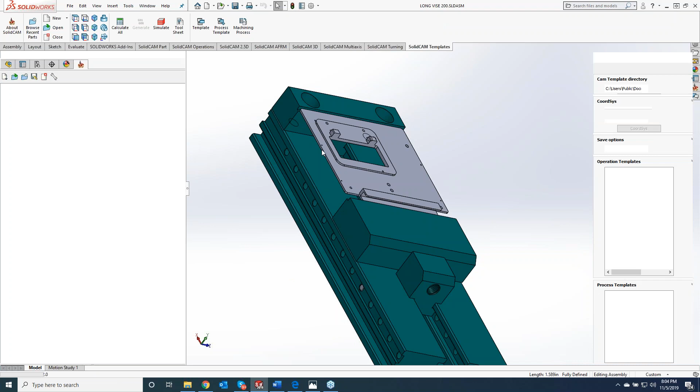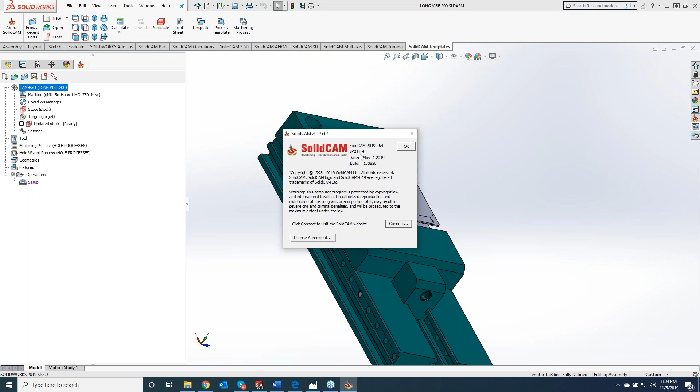Now, one thing before we get too far in this operation, what I would like you guys to do is, when you get to work or even now, go up to your help menu and check out your About SolidCAM. If you guys are running SP2, HF2, or HF3, definitely go to the website and download HF4. A lot of new improvements that development has added in there, as well as feature requests and some fixes as well.

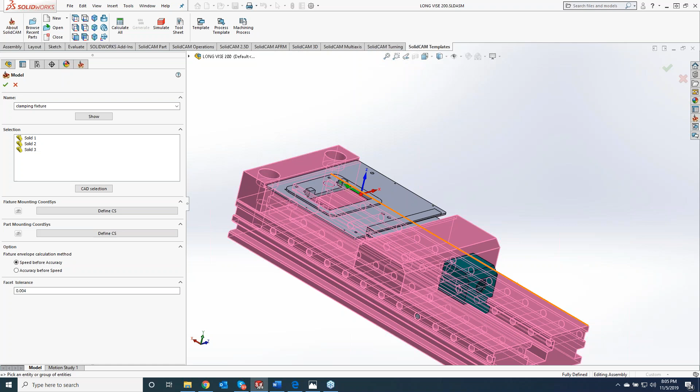Okay, so first thing I'm going to show you all the ins and outs of the profile operation. But first and foremost, we always want to do a setup. So if I go to my setup here, you'll see I don't have a fixture right now. So what I'm going to do is add a new fixture, and I'm going to call this vise here my fixture. So all we have to do is just click on the components.

We'll hit the green check mark, and now we have our fixture in there. Now, how that fixture is placed, this is more for the machine sim than anything here, but what I can do is click this little icon, and it will actually show my machine sim. So you actually see the Z0 right here is from the Z0 of my coordinate system.

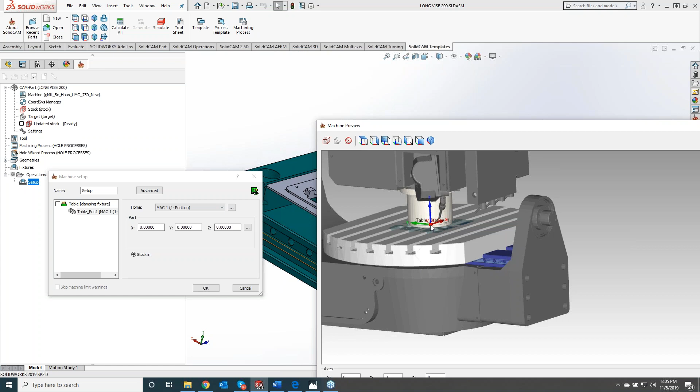So if I can just move this off for a second, what I'll do is just get a quick measurement, which is evaluate here, measure. So we have a measurement of, we'll just say 4.5. So now you push that down just a little bit too far here.

One second here, I just got to find it, I completely lost it in my toolbar. Give me 1 second here.

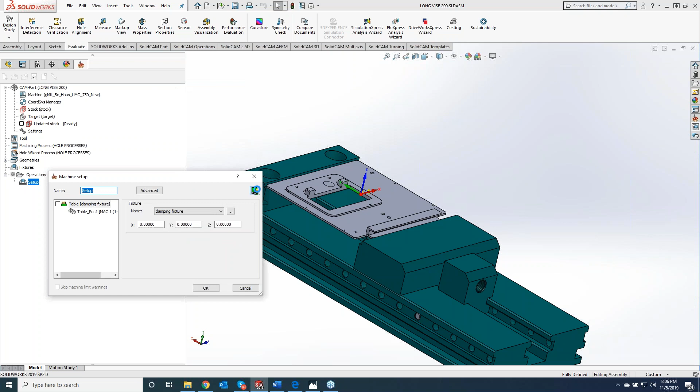So what I can do is come in here and change that to the 5.5. And then I can hit OK. And let's populate the picture here. So you can see my vise is actually sitting a little too high right now. So I can actually come here and just use my center mouse wheel, and we're just getting something that's close.

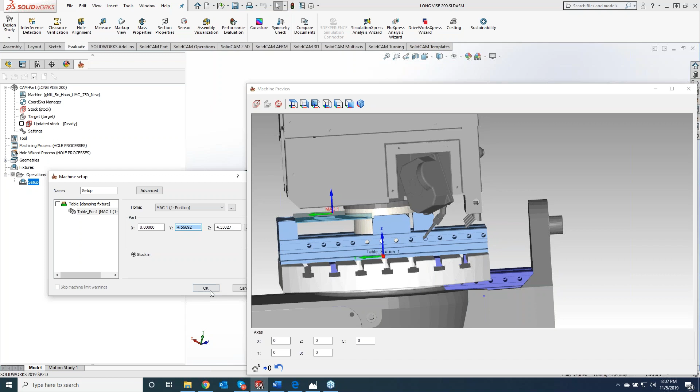It doesn't have to be 100% perfect, but you'll see that my vise is actually sitting on my 5-axis a little bit off. So what I can do is just compensate that for my Y, and I'll center up my vise here. So this way, when we go to play it through in our Solid Verify or our machine sim, everything is all centered up for us. Okay, so our setup is all set now.

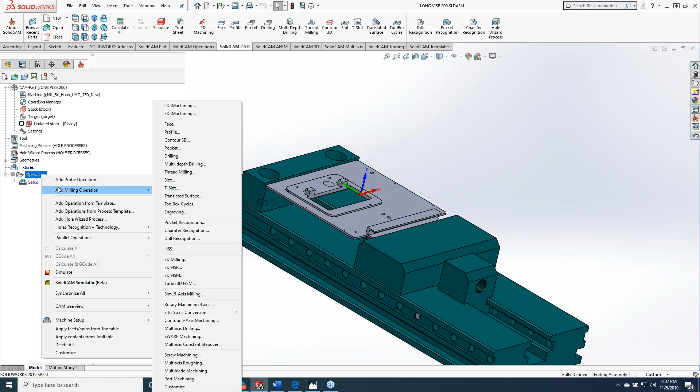So what we can do is start our 2.5D profiling. There are a couple different ways to start a new profile. You can do it right from the ribbon up here, and we can do profile. Or you can right click and say add milling operation and do profile that way. So what we'll do is just do a profile.

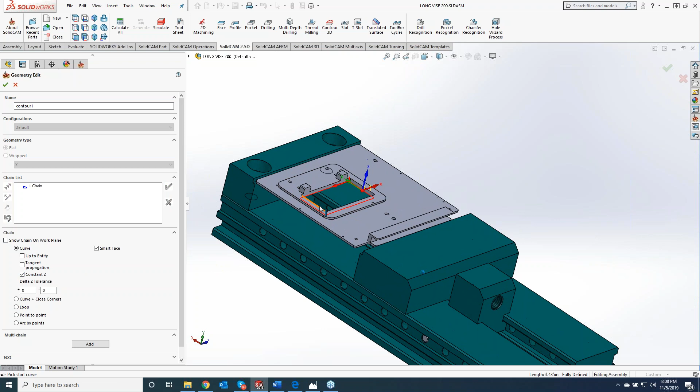Now, what I was telling you guys about with the geometry. So as I want to add new geometry here, I can come in here and click this line, and it will just add the one line. Now, if I had my constant Z turned on, it would wrap it around. So if you'll see in here, I have a complete chain going all the way around.

Now, along with the new smart face, if you have a flat face to click on, we can actually chain that as well. So if I just click on this face right here, it's going to chain everything that it can on this face for me. I don't need these additional chains right now, so what I can do is just come up here and delete them. So yes to all.

Another nice feature inside here is, let's say I grab this face, I got a bunch of different chains, but I want to reverse the direction. So you can reverse each individual chain, or I can reverse them all, which is a nice feature. So you guys can just highlight the ones that you want and do reverse or click F5.

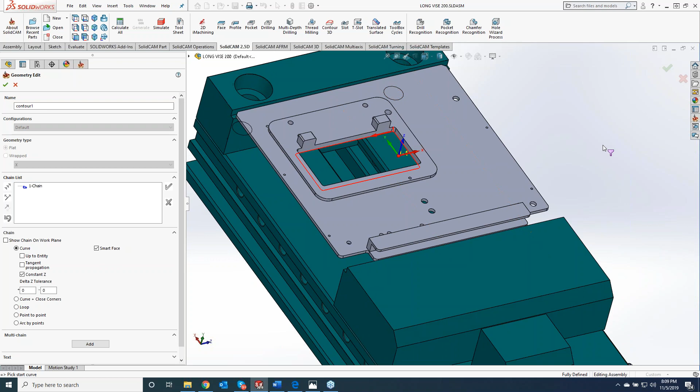Now with profile, chain direction definitely does matter. So this is telling me that we're going to be doing a conventional or a climb cutting right here, working our way around. Now, like I was saying, you do have the tangent propagation. The two that I use a lot in here, and this is not just for profile, this is just your geometry picking, are going to be curve and point to point.

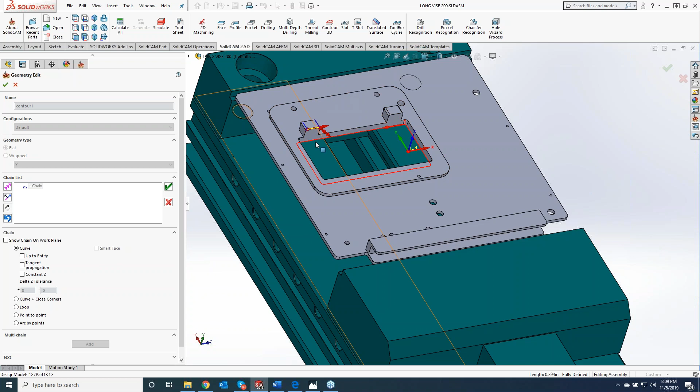So if I'm missing a point, and I'll just turn off our constant Z here. If I want to chain from here over to here, I don't have any physical geometry when I'm trying to grab this. So there are two different options. I can actually go down and go over and then come back up, or I can do my point to point, and I can just click where I want that point to end, and it will automatically create a line geometry there for you.

So if you guys are missing any geometry or have an open area, there's no need to draw a sketch in there. You guys can just do the point to point and it will actually skip right over it for you.

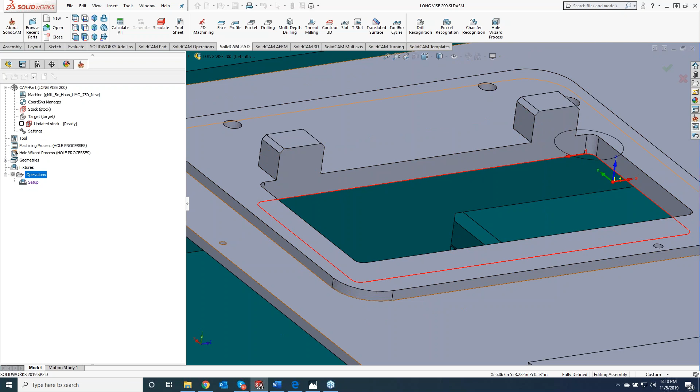So one other thing I would like to show you here is, let's do a part number. So I'm just going to do a sketch here, and we'll just say SolidCAM is our part number.

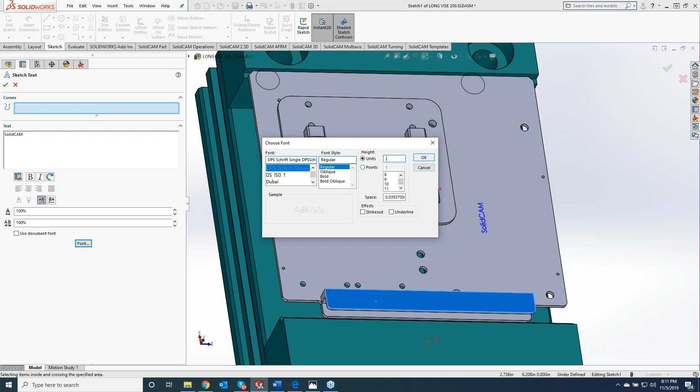And what I'm going to do here is I'm going to switch it over to DPS Schrift, and we can make it a little bit bigger here. I'm going to do 0.375, and you can see my text right there. So let's just pretend that's my part number.

So inside the profile operation, we can actually use that geometry as well. So inside SolidCAM, you do have the option to do an engraving, which we can use this for, or we can also do profile. So to grab the geometry for an actual text, what I can do is click on multi-chain, and I can switch it over to text. And all I have to do is just click on my text, hit the green check mark, and it will automatically chain everything for me.

And give me 1 second here. I see you got Steve in here.

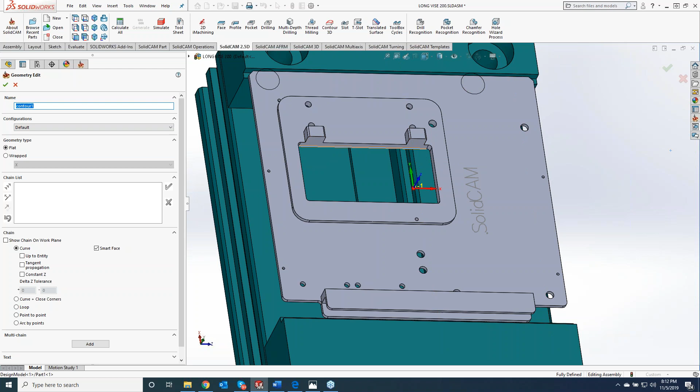So it will automatically chain all that geometry for me. So a lot of different options on chaining, and not so much just profile, but we can actually use this for profile, pocketing, pretty much every operation in here. So let me just go ahead and just decline that for a second. So we'll just say we want to do our inside pocket like we were originally doing, and we'll do our constant Z. And now we want to machine out that center.

So that's one way of grabbing geometry, is clicking the new geometry. One thing that SolidCAM does for you is it stores all the geometries behind the scenes for you. So if I want to use the same contour again for a different operation, all I have to do is hit the drop down box right here, and I can see all the different contours or pocketing or all the different geometries I've created.

Another nice thing is you can do a show, and it will show you your physical geometry. Or what I like to do is click this button right here, and if I have a whole bunch of geometries, I can come over here and click on the one that I'm looking for, and it will highlight it. So I can hit the green check mark at that point.

Now, another way of doing a geometry selection is the profile silhouette. So basically all this does is takes a picture of the outside, and it will automatically create the geometry for us. So if I did silhouette, it would automatically create this outside boundary for us and get that geometry, so I won't have to chain anything.

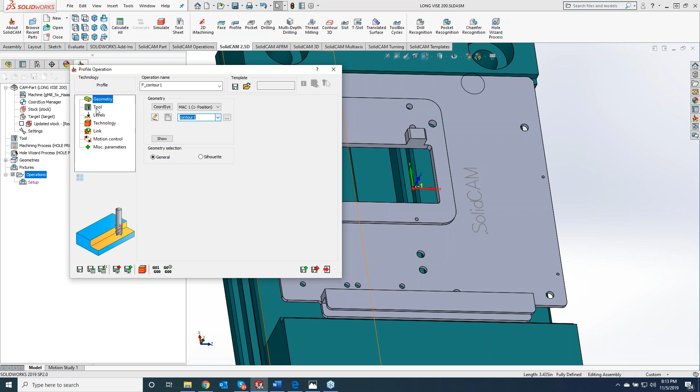All right, moving forward here. Tool, pretty simple and easy. We can go ahead and grab a tool. This one is a 1/4 inch end mill, and if I want, I can put 0.25 end mill, and let's go ahead and throw a holder on there. I apologize here. It takes a little bit because I have so many different holders in here.

Steve, are you with us now? Just going to say, sorry, I'll apologize too. I'm a little late, Kevin. Sorry about that. All good.

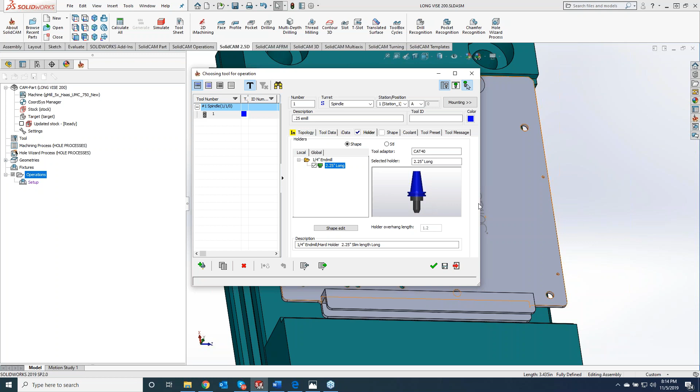All right, so I'll use a 1/4 inch end mill holder here with a 2 1/4 shank or extension. And if I want to see what that tool is looking like, I can click over here. And obviously, in the real world, my total tool length is 3 inches. My outside holder, that means I'm only hanging on by 1/2 inch, so that's really not realistic at all. Let's just do 2. Actually, let's do 1.5. Shank down on that tool.

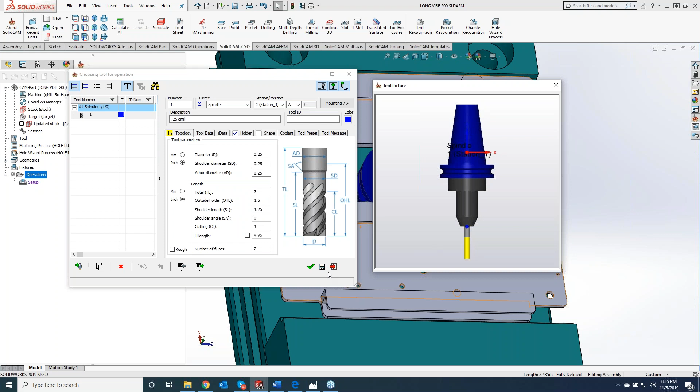And if we want, we can add coolant at this time as well. So not much here in the tool page. Now you can come in here and set different feeds and speeds. You'll see in here I have a feed rate of 1 for everything. This is just a safety factor for me.

So if I forget to put a feed rate in here and I go to run this on the machine, it's going to be running super slow. And this is all set up by default. So I know that I missed something with my feeds and speeds. So that's completely up to you guys. And this is just in your SolidCAM settings itself.

We can set up independent coolant just for this tool. As well as, this one comes up quite a bit, if we're limited on our Z travel or maybe our X and Y because of fixture, I can come in here and set up a custom location. So I can tell the table to move over to this direction and then go up for the tool change to avoid any clearance issues or anything that I may have in the way.

Now levels here, we've got 2 different options. I can actually have multiple different, this is new, I think in 2018, I can have multiple different profiles at different depths now. So since I only have this one chain, I'm only really worried about just the one.

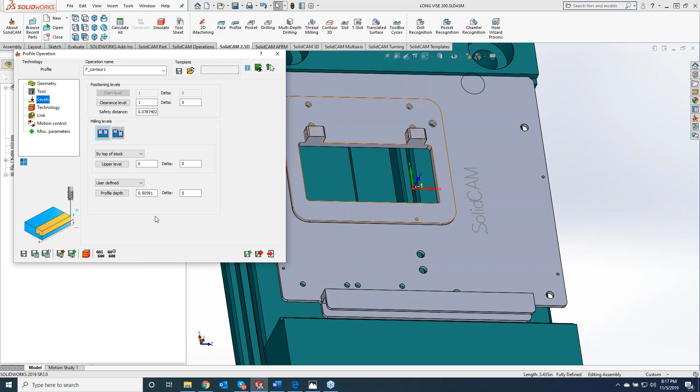Now the profile depth is all based off of where I chose my chain. So if I did a chain down here, it would populate the number. If I did a chain up here, it would populate the chain depth of this chain right here. Now, a lot of times we'll have to go in there and change it just because of our geometry options. So there is absolutely no need to click on the profile button anymore.

If you guys just come in here and get your mouse cursor, I can't even talk tonight, mouse cursor highlighted in the profile depth field, I can actually just come over here and click on the bottom of the part. And you'll see that it's green now. Some of you guys may show up as green, some may show up as red, but both colors are fine. As long as there's a color in there, it's physically linked itself to the model. So if this model was to grow or shrink in size, this number would automatically adjust for it.

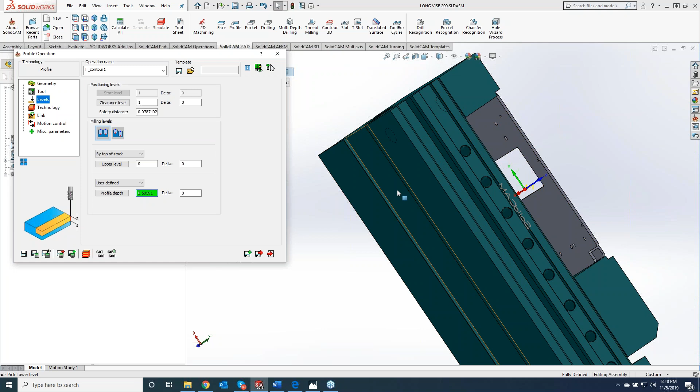So for this particular one, if I go right down to the bottom of the part, we may get a little bit of a burr going around this outside perimeter. So what I can do is come in here and tell it to go an additional 25 thou deeper, so I'm not going right on that tip of that end mill. So pretty cool feature right there. And like I said, there's no need to click the upper level button anymore. You can just get your mouse cursor on there and click the top of the part. So any questions so far, guys?

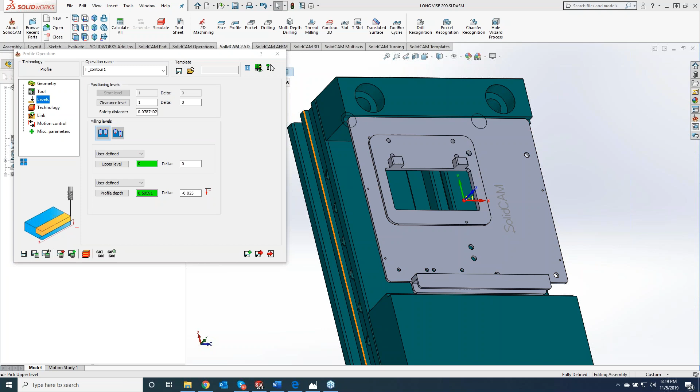I don't see anything coming in here, but get a lot of quiet ones in here, Steve. No, I'm monitoring the questions too, Kev, so we're good. Perfect. Okay.

This is kind of where the guts of everything is. This is one thing I really love about SolidCAM: it doesn't matter if I am doing a profile operation or a pocket operation or drilling or thread milling, the guts of everything is always in the technology page. So starting up at the top, do I want to use my tool side left, center, right? Completely up to you guys. Now, since our chain direction is going that way, I want to keep it on left.

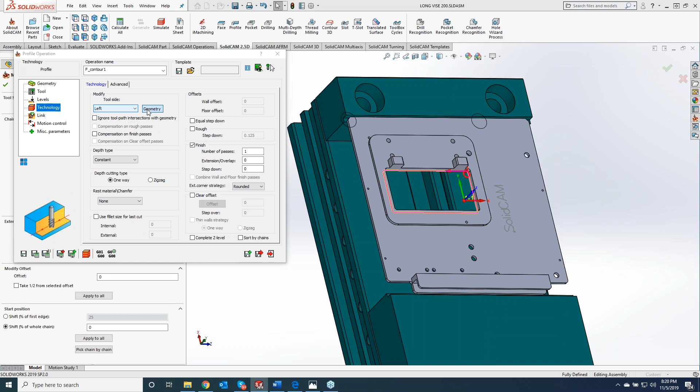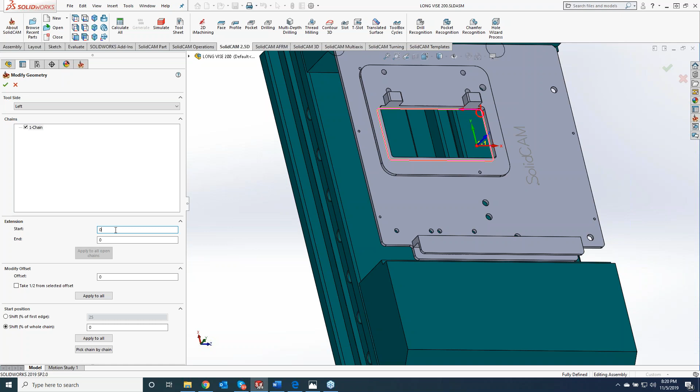Now, I can actually click on the geometry button and completely change how this geometry is going. If I'm just doing a single line, I can add an extension in here. So maybe if I'm just milling this line right here, and if I didn't have my fixture in the way, I wanted to extend it past to compensate for this area, I can do an extension right here. Or if I go a little bit farther down here, I can add an offset in here. So maybe I want to leave 5 thou for grinding or a different finishing op. I can do that as well.

Now, the start position is one I really like to use. Basically, I don't want to start that end mill right in that corner. So if I just get my mouse cursor where the 0 is, I can come in here and click anywhere, and that will be my new start position. This is really nice if you are trying to get an exact start position of your end mill where it's coming down. I can just create a sketch point and smart dimension that sketch point and actually get that end mill to move to that exact point. So really cool feature in there.

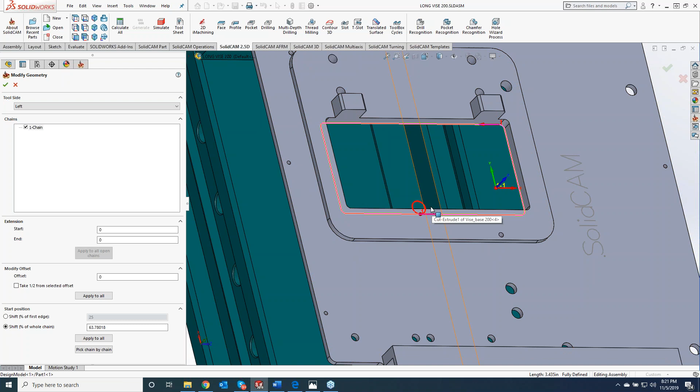Now we're going to start at the top here, the ignore toolpath with intersecting geometry. And what I want to do here, let me copy this, because I don't want to get too in depth with this one, but if I come over here, this is under the SolidCAM University channel. This video walks you through step by step of what that intersecting geometry does for you. So basically, if you have two geometries intersecting, it'll kind of overlook it.

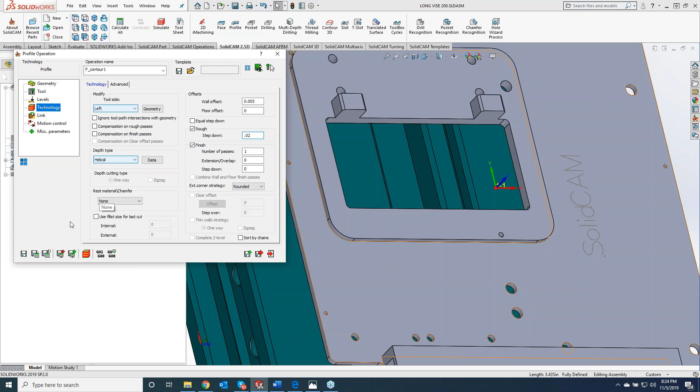And what it will do is a spiral working its way around. And I really like this feature just because that end mill is in constant contact with the material at all times. So with the step down, starting right here, for every 360 degrees that we go around this pocket, it is going to go down an 1/8 inch. So if we want, we can do, let's say 20 thou, and I'll show you the difference. We'll do save and calculate.

So you'll see right here, it's starting right here, arcing in and just doing a spiral, working its way all the way around. Let's make this just a hair bigger so we can see a little bit better. So you can see it stays in constant contact with the material going all the way around. Now, if we switch this over to constant, it will go around at 100 thou, make a pass, arc off, then go down another 100 thou, arc in, make a pass, go all the way around. So completely up to you guys on how you want to handle that.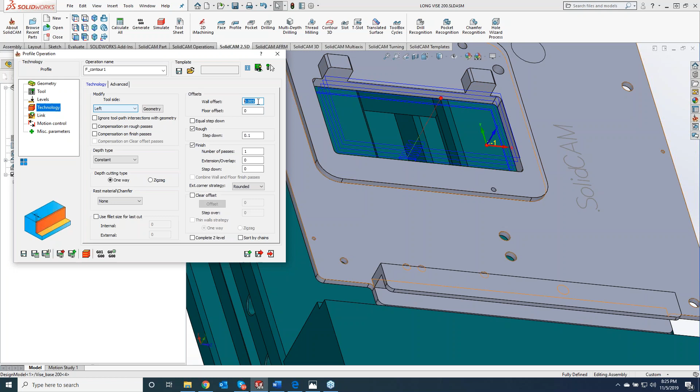And basically what's going on here is we're telling it to do a roughing pass, doing 100 thou step downs, leaving 5 thou on the wall, and that 5 thou on the wall will get cleaned up by this one finish pass right here. So let me just do a top-down view for you, and we'll zoom in here.

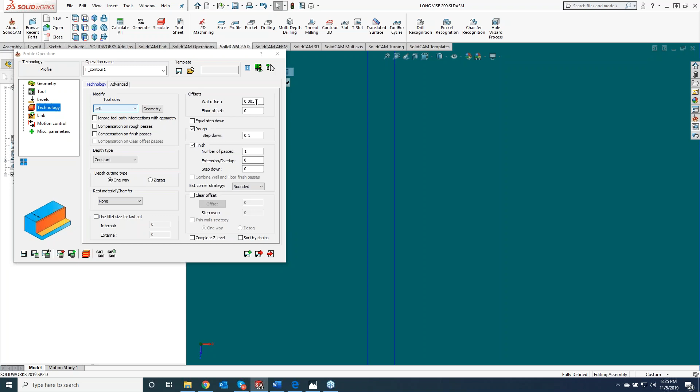So here's our lines. This is our roughing pass right here. And then that last pass is taking that additional 5 thou of material off there. So if you're really looking for a tight tolerance in there, definitely use a roughing and finishing. You can change this number to whatever you'd like. By default, though, it will show 5 thou on the wall for you. I'll zoom back out here.

And we also have the option to do one way or zigzag. The zigzag would just come into play if we were doing just a single line geometry. This zigzag does come in very handy if you're doing a slot, like a 1/4 inch slot with a 1/4 inch end mill. We can tell it to do a zigzag, and it will basically work its way down into the material at 100 thou. Now, rest material here, let's just go ahead and play this through.

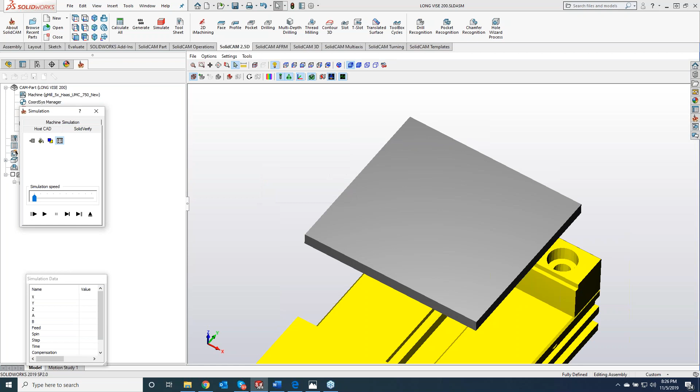And we won't worry about the machine sim for this second here. We'll go to SolidVerify. All right. So if we go ahead and play this through here, speed this up. So if we go into the corner here, do execute, we still have material left over. And this is our stock target comparison. So using that 1/4 inch end mill, I'm not able to get everything in that corner right now.

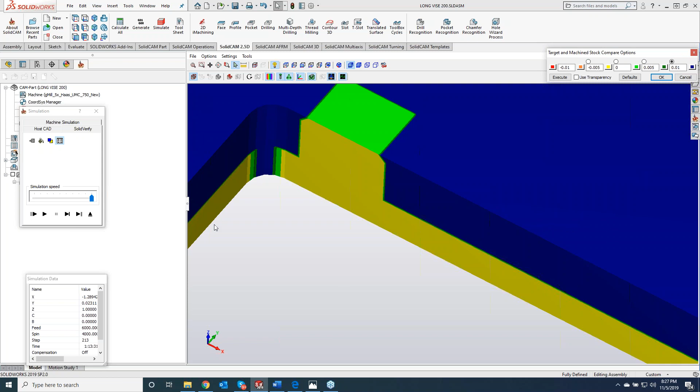So what I can do is come over here. It hops out of here. And I can make a copy of this. So if I do save and copy, it makes a mirror copy of what I just previously did. But now what I can do is I can change it over to rest material. My previous tool diameter, I can't remember. So I can come in here, 1/4 inch end mill, just click on that end mill.

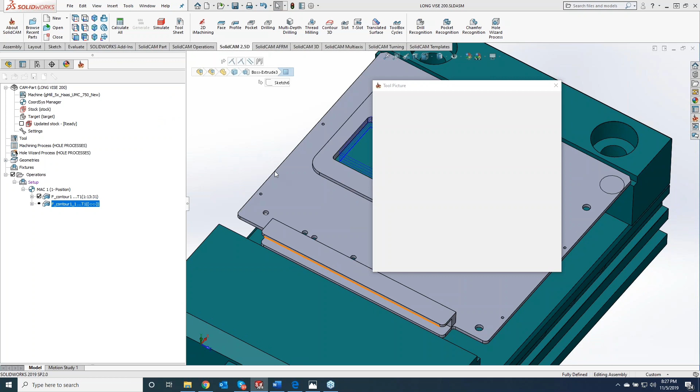And now all I have to do is switch this over to a smaller tool. And then what it will do is it will come and clean up those corners that were left over. So let's just do one. We'll do 625. Now, all I have to do is save and calculate. And you'll see all it's machining is just those corners that got left over from the previous tool.

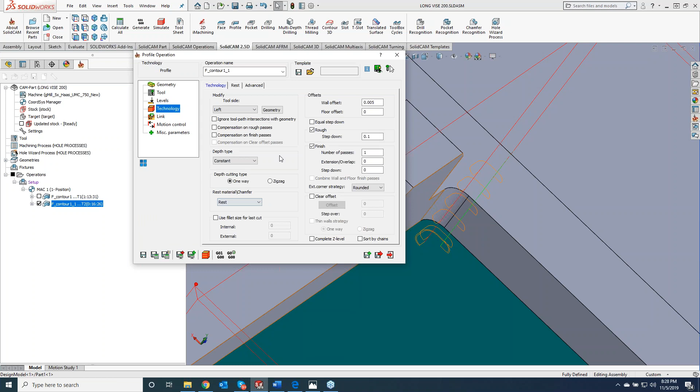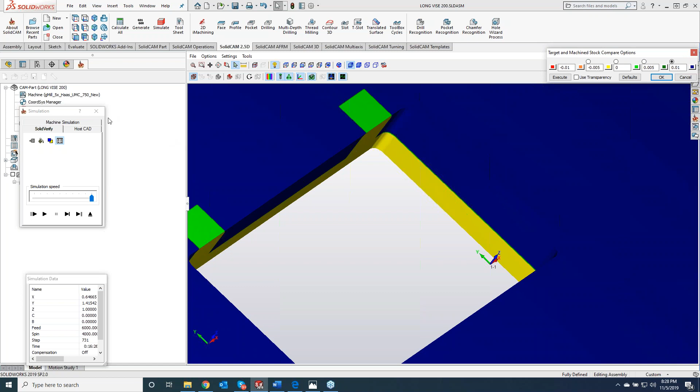So that rest material is a great feature in here. So we're not having to basically recut the entire part with this little itty bitty end mill just to clean out those corners. So if we go ahead and do our simulate here, play that through. And now you'll see we're nice yellow going all the way through. So we know that we've achieved our goal of machining that part up to size. So that is rest material.

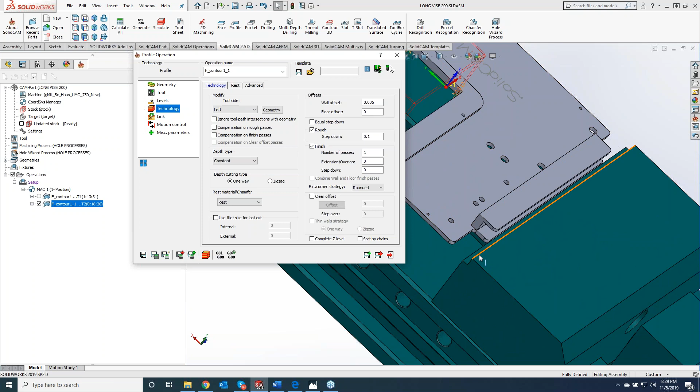Now, using the fillet for last cut, what this option enables you to do is add a radius on any sharp corner. So if we are, zoom out here, if we are machining, well, this one's got radiuses on it, but if we're machining, let's say this edge right here and this edge, you'll see that we got a sharp corner on there. But maybe we want to radius it, so kind of as a deburring operation, we can use the fillet for last cut, and we can specify what size radius we'd like for internal and external right here.

Now coming over to the right side, we have the wall offset. Now this is what's being left on the roughing pass for the finisher to clean up, as well as the floor. Equal step downs is kind of self-explanatory, but it's going to rough it down at 100 thou, and if I turn this on, it will equal out the step downs, so they're taking all even passes. So if we're doing 100 thou and we have a 0.25 depth of cut, that last one won't just be a small little thin cut, so it'll actually equal out all of our step downs for us. Roughing, finishing.

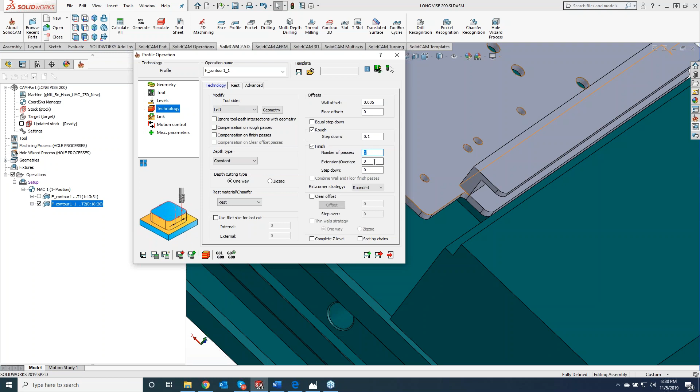Now, a couple different options with finishing. We can tell it to do 2 passes, or 3 or 4 or 5, however many you guys would like in there. If you're working on some harder material or a case harden, we can take a couple extra laps around. Now the extension overlap is quite nice because what we can do is, instead of

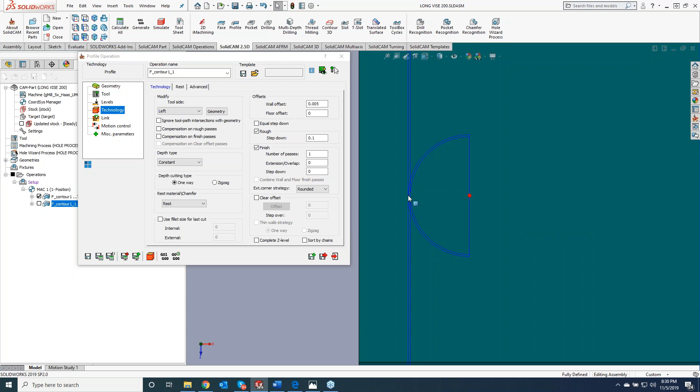starting, let me turn this toolpath on here. So you'll see, let's do this. So right here, we're starting and stopping at the exact same point every single time. So what I can do is I can put in an extension so it's starting at a different spot than where it's ending. So we don't get that little witness mark there.

Now your step downs is basically, do you want to do that finish pass all in one cut, or we can keep stepping down as well, kind of like the roughing operation. External corners, we can do rounded, we can do sharp, we can also do loops. Now the clear offset is something that also gets used quite often. Now, one thing I forgot to mention is, as I'm clicking around, you'll notice that this picture or this dialog will change on whatever I'm clicking on. So if I go to step downs, it's kind of showing me a little representation of what it's looking for in this operation.

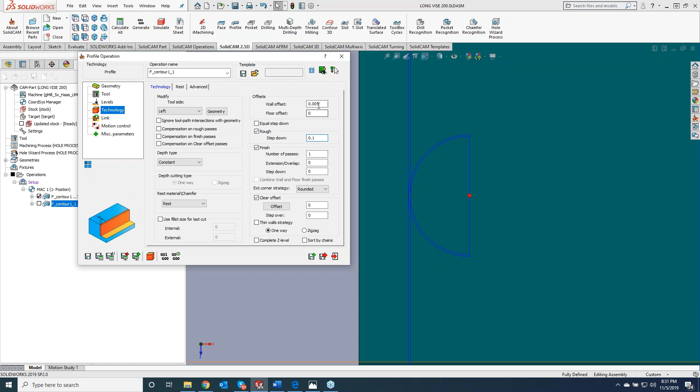So if I do a clear offset, what that's basically going to do is it's going to offset my geometry. So if this was like a casting and I have a lot of material that I need to get out of there, I can come in here and type in 0.25 of an offset, and I can tell it to step over every 100 thou. And let's just see if we can calculate this real quick. I did it on the wrong one. Let's get back to this one here.

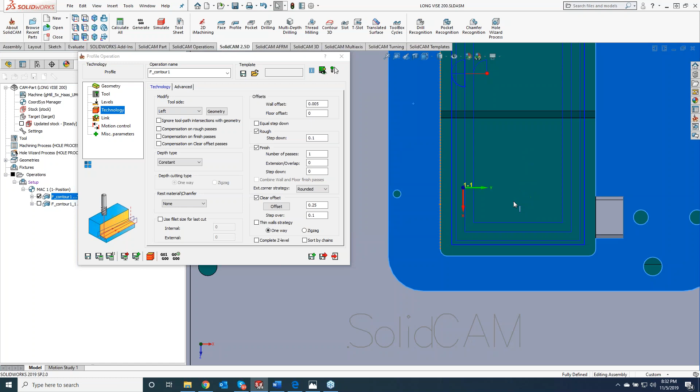So I'll do 0.25, 0.1. Now, if we do a top-down view, what it's doing is it's offsetting my geometry by 1/4 inch, so right here, and it's doing all the same passes. Once it finishes that entire geometry, it's going to come up, come over the 100 thou that I told it, and do another pass. Same thing, keep moving over.

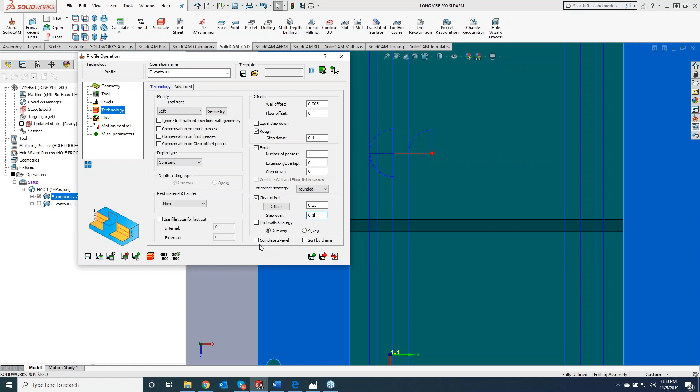So this is a great way if I have a lot of material on a geometry, I can actually offset it over for you. You can do this as one way or zigzag, and then the complete Z level. So if you're doing several different profiles, what it will do is it will do a complete level. Well, let's zoom out here. Let me turn this off, save and calculate.

So what we can do is, if I am profiling out this profile here, and then I also have a profile over here, I can tell it to do complete Z level. So it will do all the roughing and finishing on this particular pocket before it comes over to this one over here. So nice feature. And then we can do sort by chains as well. Any questions on the technology page?

All right, so also in the technology page here, we have what's called the advanced tab. Now in here, it all depends on what you're doing, but pretty much every operation that we have in the technology will have an advanced tab. So what I can do is I can do final cuts, and what this option enables you to do is to divide up the machine depth into 2 different regions, kind of like we were just talking about here.

You can do a wall draft. So if I'm doing a very tall part or a 3D part even, I can chain that bottom, and I can also do a wall draft here, and I can tell it what angle I want, and if I want to start from the top and work my way down to the bottom, or if I want to start at the bottom and work my way up to the top. So you do have the wall draft option there.

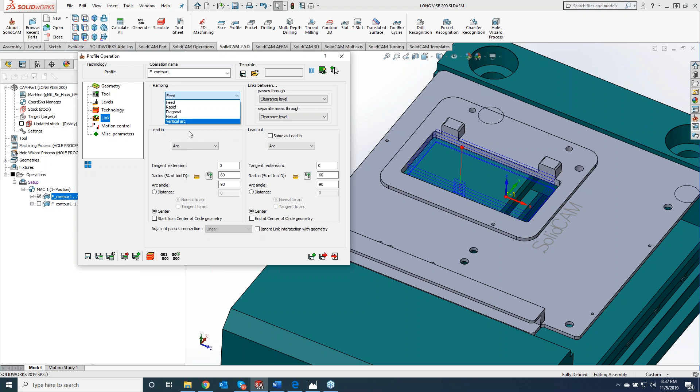Now, along with all of our operations, the link page is always going to handle your lead in and lead out. So this one, we're ramping into the material by using a feed rate. So as it's coming down, it's going to use the feed rate coming into the material. I do have the option to do different ones. I can do a rapid, I can do a diagonal, I can do a helical, or a vertical arc. So a lot of options to really customize for you guys.

Now this one, you'll see that we're doing an arc in and an arc off. If I want, I can set different ones for each one. So if I want to do a normal for my arc off, so you can calculate here. So what we're doing is we're coming down here, we're arcing in the material, going around, and then it's just coming to that 90 degrees, move over, and then come back up.

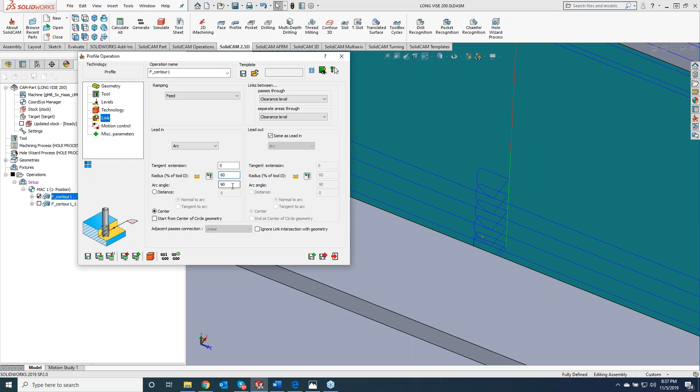If I want to set that as the same, I can just do that same, and then I don't have to even worry about it. And like I said, keep an eye on these pictures over here. So if you're unsure, all right, well, the extension is what? So I can come over here and I can see there's my extension. How big of a radius do I want to do? And what arc angle do I want to approach from?

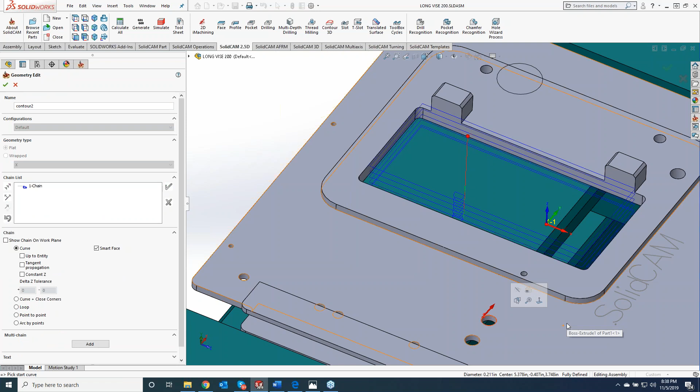Now, if we're doing profile, let me just take, so this is 221. What I'm going to do here is I'm going to start a new operation. And this is one I like to use for my tight tolerance bores. And I'll grab that little 16th in there. And upper level, we can start there. Profile depth. Go to the bottom here.

And so here's what I really like to do with my tight tolerance, especially for circular holes: I can do a helical and I can tell it I want to do a 100th step down. I want one pass at a step down of 100th thou. Now in my link section, what I would like to do is I want it to start from the center of my hole, just so I have enough clearance because it's pretty tight, small end mill, small hole.

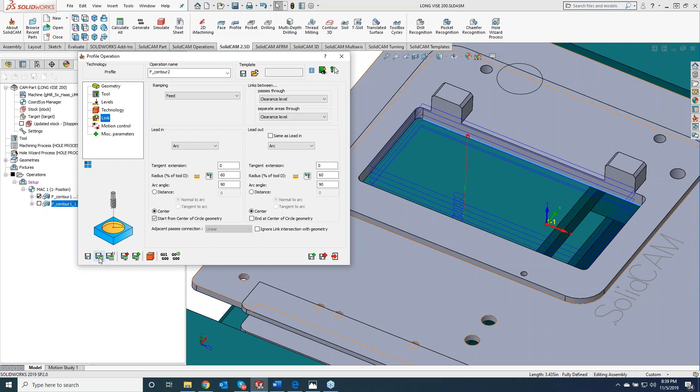So what I can do now is I can tell it to start from the center of the circle geometry. So what it will do is it will automatically find that center of our circle for us and start in there. So if we do save and calculate here, do a normal 2, you'll see right as that end mill is coming in there, it's starting right at the center. And if I want, I can do the same as lead out. And now my end mill is coming down right on center for us. So nice feature to start in the center.

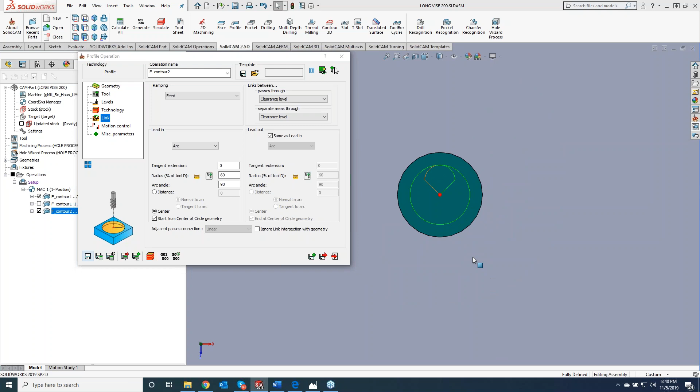Like I said, the sky's the limit, and you guys can see that we're doing that nice helical entry going around. And that really works great for tight tolerance holes.

All right, last thing I would like to cover with everyone is the fourth axis functionality. So in here, if we're running a fourth axis, I can actually get my fourth axis indexer to rotate around. So we have a couple different options in here, and I'm going to get into this more a little bit later on, the polar versus Cartesian. But basically, what axes do I want to rotate around? If I do Cartesian, I want to use my X and C, Y and C, and Z and C. Or you can do a polar with the same ones. So it's however you want your output to be.

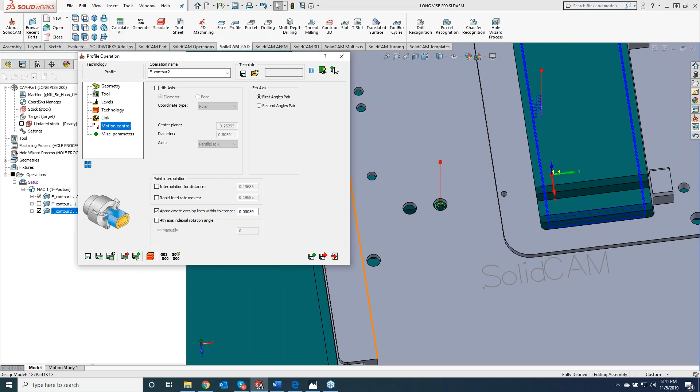If I want to do it off of a face, or I can actually do it off of a diameter, and I can actually put the diameter of what I'm cutting in there. Now, another nice function, and we'll actually get into this, do save and copy here. When we're doing engraving on a fourth axis, if we click New Geometry, we want to wrap that profile operation around a 4-axis part.

So we basically want the tool to come down, and we want to use the indexer as a lathe. So instead of my geometry being flat, I can use this wrap functionality, and you can pick what axes you want to wrap around. Now, most commonly on a fourth axis it's going to be around the X, but we do have Y and Z. And then you guys can grab your geometry.

So, whew. Am I missing anything, Steve? I think you're doing well. Fast, but well. A lot of info. Yeah, there's a lot of info in here.

And like I said, as simple as a profile operation is, there is a lot in here. And the only reason there is a lot in here is because we don't want to take any control away from you guys as the users. So we want to give you as much control as possible to get the part machined the way you're looking for.

Now, the last thing I'm going to cover is the miscellaneous parameters. Inside the miscellaneous parameters, I can type a custom message that will automatically output with my G code. But more importantly, each one of your posts is going to be different. So some may show like an M00 stop in here. These are fully customizable along with your post processor.

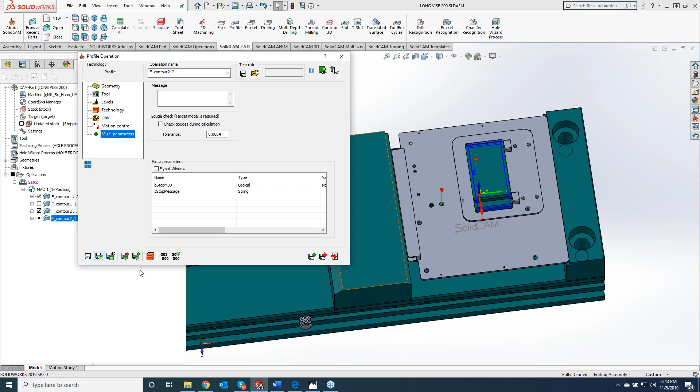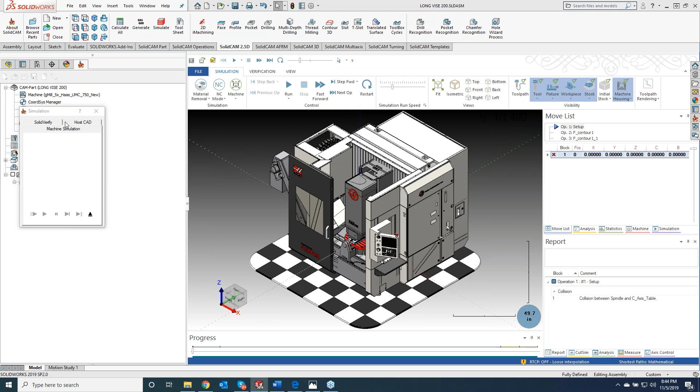All right, so let's save and calculate here. Now, we want to see everything that we did. So I can come up here to simulate, and we will do a machine sim. And even though this is a very standard 3-axis part, I really enjoy the machine sim just because I can see exactly what's going on. I know it costs a little bit extra, but that little bit extra is about the price of an end mill and a holder, so it's well worth every penny. Can save you a little pain and suffering at the machine too, right, Kev?

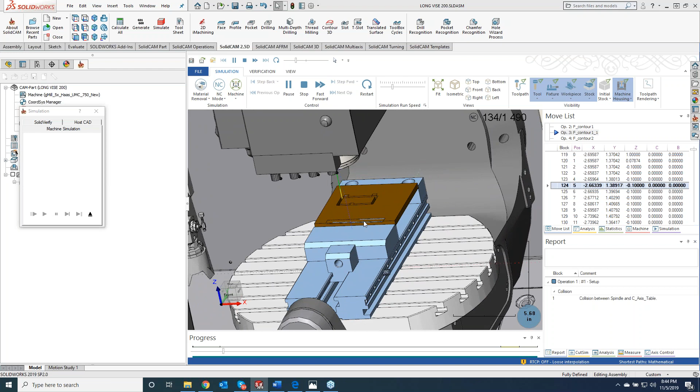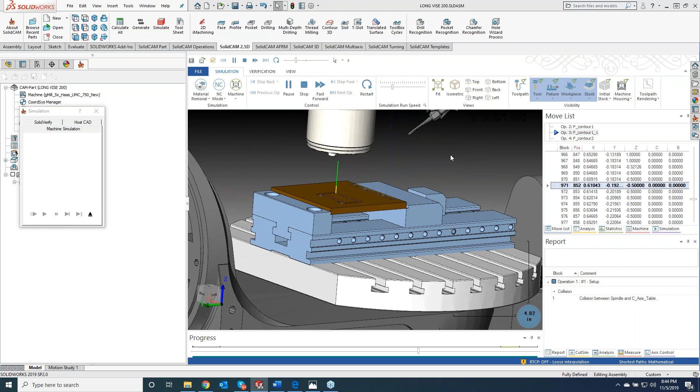Yeah, absolutely. So if I come in here and zoom in, I can see exactly what we're doing here. So it's doing the rest material now. And if I want in my machine sim, I can turn off my housing. So if I want to get really zoomed in and kind of see what's going on here, I got the entire machine right in here. Now you'll see that I forgot to put a holder on there, which you don't need to put a holder on any tool at all. That's just more or less for visualization for you.

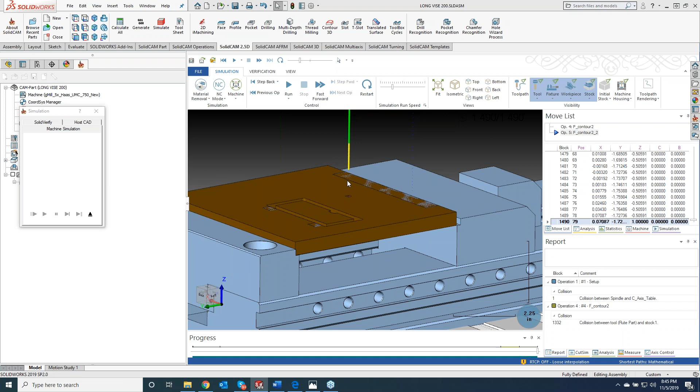But if your holder does run into the workpiece, the machine sim and HostCAD and SolidVerify will tell you that you're crashing. So it will give you that prompt. So that's what our part looks like, all finished, done. Turn the entire machine back on. You can kind of see this is what the Haas UMC looks like, but that is basically profiling, the ins and outs of everything inside profiling for you guys.